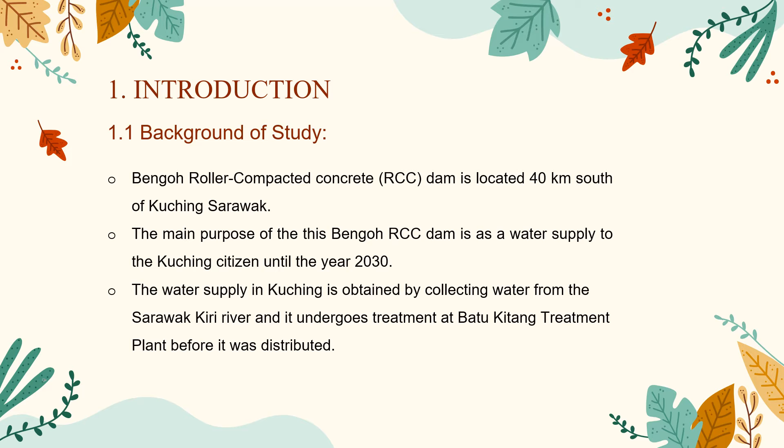Problem statements. The main purpose of the Bengoh RCC Dam is as a water supply. However, it was just completed in the year 2012. And even though the Kuching Water Board regularly tested the water quality, there is no further scientific research done to ensure that the reservoir water is completely safe to be consumed and used by Kuching citizens, as there used to be a village located nearby but is unfortunately submerged when the dam started to be filled with water. This concerns us because without any further research done on the impact, we cannot guarantee the safety of the water.

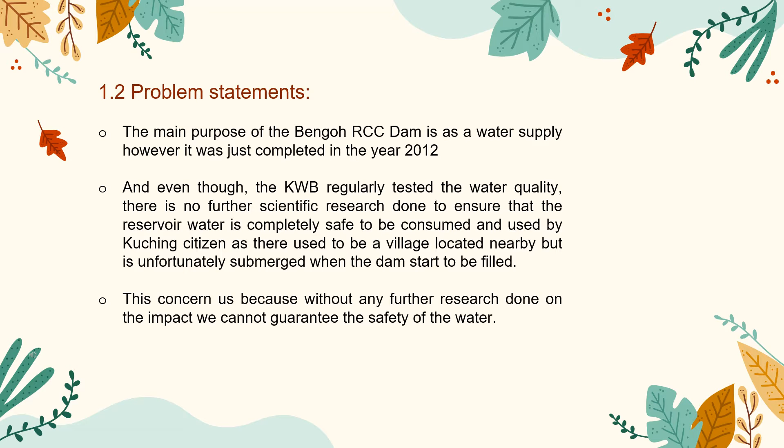The significance of study of this research proposal. This study will benefit the society by ensuring that there is no side effect from using the water as daily use or consume. Contaminated water can bring a lot of health problems to us such as diarrhea, cholera, dysentery, typhoid and polio. If used externally, contaminated water can even cause skin irritation.

In fact, since the day the completion of the dam in the year 2012, it was never scientifically tested for its water quality index value. The research will be carried out to assess and determine the water quality index, and the result will be used to determine if it's up to standard to be distributed or not.

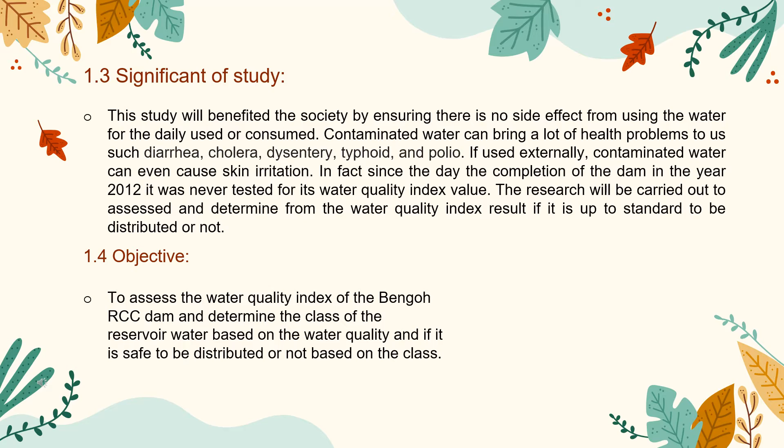The objective of this research is to assess the water quality index of the Bengoh RCC Dam and determine the class of the reservoir water based on the water quality index, and if it is safe to be distributed or not based on the class.

Literature reviews. Background of study. Roller compacted concrete dam. Roller compacted concrete dam or RCC in short is a special dry concrete that has zero slump and is made from the same constituent as an ordinary concrete, but roller compacted concrete dam has lower cement contents compared to normal concrete. RCC is usually compacted like a soil, making it very sturdy.

RCC is mainly used for construction of big structures such as dams or any large horizontal surface like highway foundation. The low cement content causes it to reduce the development of temperature in the mass concrete and reduces thermal stress. RCC is also inexpensive and is one of the fastest methods to use for concrete construction and repair.

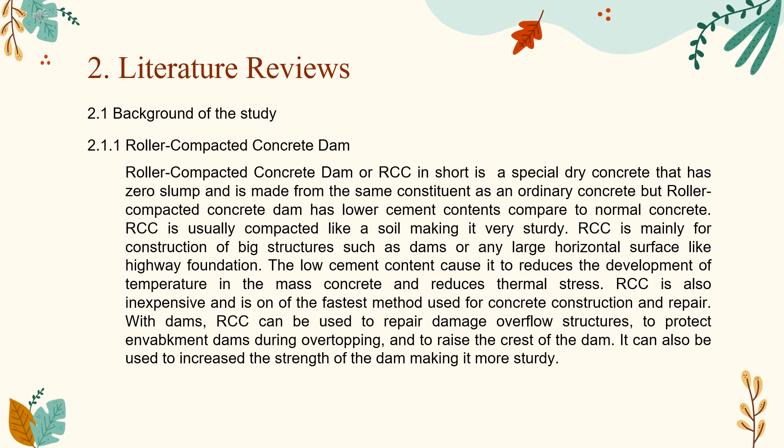With dams, RCC can be used to repair damaged overflow structures, to protect embankment of dams during overtopping, and to raise the crest of the dam. It can also be used to increase the strength of the dam, making it more sturdy.

Water quality index parameter. Dissolved oxygen. Dissolved oxygen is measured to find out oxygen gas that dissolves in the water body. Dissolved oxygen is very important to every organism. If there is a lack of dissolved oxygen in the water, it will affect the health of the organisms. Not only that, DO can also be used as a pollution indicator.

Next is biochemical oxygen demand, BOD. This is the amount of oxygen needed by bacteria to degrade and oxidize organic materials. Usually 5-day BOD is used as a standard to measure the oxygen consumed by an organism. The level of BOD in polluted water is supposed to be high, while in unpolluted water the level of BOD should be low.

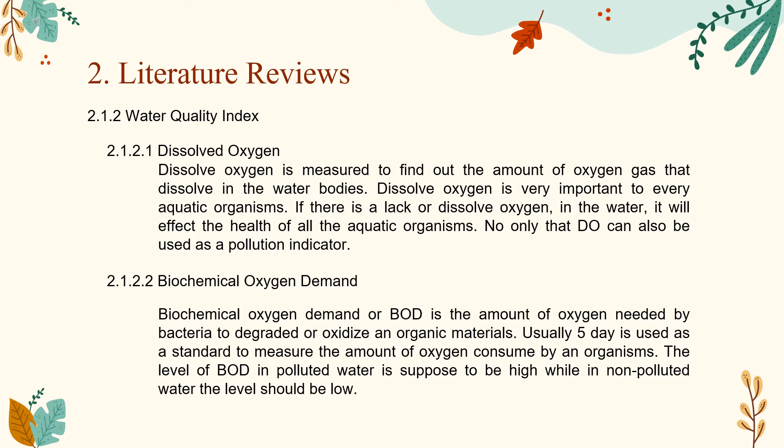Chemical oxygen demand. COD is the oxygen gas required for chemical reaction to oxidize organic and inorganic materials chemically, and the byproduct of this reaction will be carbon dioxide plus water. The level of COD will show the strength of the organic material and also the pollution that is happening.

If the value of COD is high, that means it is polluted because it contains a lot of organic materials. Usually, the value of COD is bigger than the amount of BOD.

In COD, organic material is decomposed completely, while in BOD, the organic material decomposes only partially.

Ammonia nitrogen. Ammonia nitrogen is one of the parameters that can be used as a water pollution indicator. This is because wastewater contains high nitrogen. High amount of ammonium nitrogen is very harmful to organisms. Normally, unpolluted water contains less than 0.1 milligram per liter.

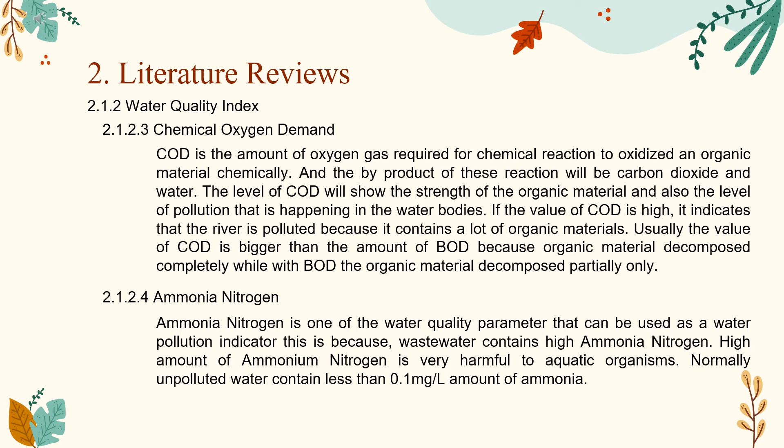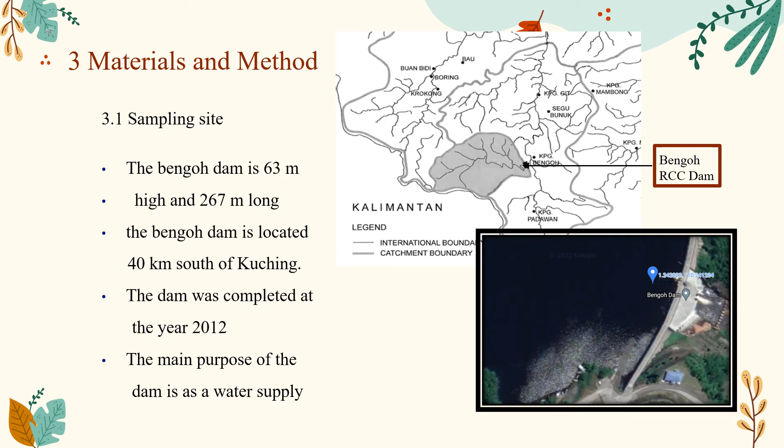Materials that will be used in this research will be sample, YSI multiparameter, box filled with ice to contain the water temperature, and sample bottles to collect the sample.

The method of this research will first be to collect samples using Van Dorn samplers at different depths, which is 20 meters, and the water sample will be kept in sample bottles, and this sample bottle will be kept in ice to maintain their temperature. The water quality will be measured using YSI multiparameter, and this experiment will be done 3 times at those different depths.

The expected outcomes of this research. We are expecting the result of the water quality index of reservoir water at either class 2 or 3, as it will be safe for consumption and daily use without causing any side effect in the water treatment process at the Batu Kitang Treatment Plant.